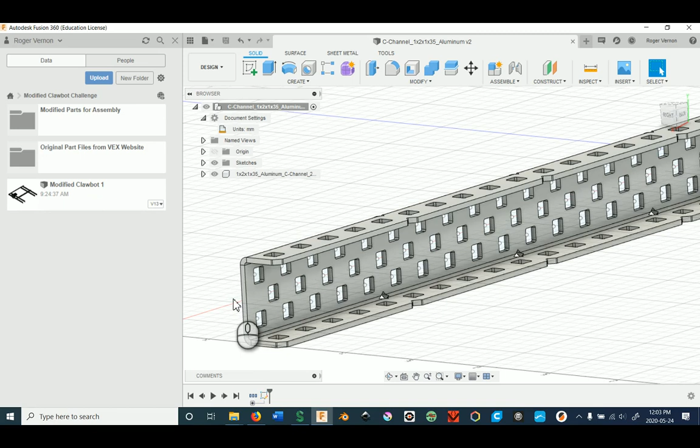In this tutorial I'm going to follow up on our previous one about how to put together points for assembling VEX parts for a VEX robot. So in the last video I showed you how to put together a point, how to do rectangular patterns on the layout of a sketch, and I'm going to show you how to transpose those now from this face across to this face. Okay, well, let's get started.

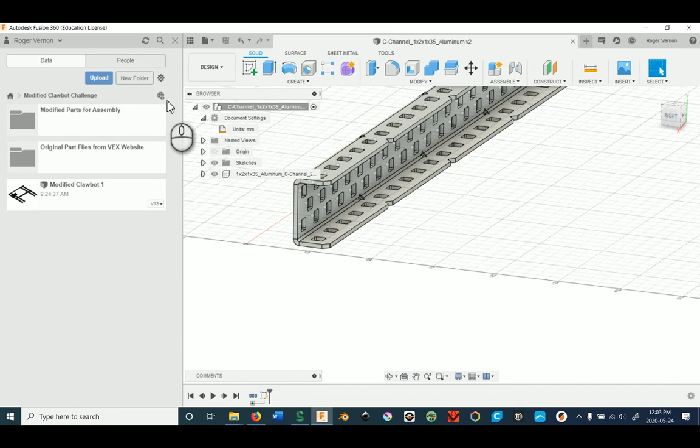I'm going to do the same thing that I did before. Do I need to bring in a file from here? Nope, I'm all set. So I'm just going to grab my sketch, and I'm going to be drawing points on this face now instead of the other face. So this face here is where I'm going to be drawing. And it's taking a while to think about life for some reason. Apparently I really scared it. There you go. Alright, so it's all laid out.

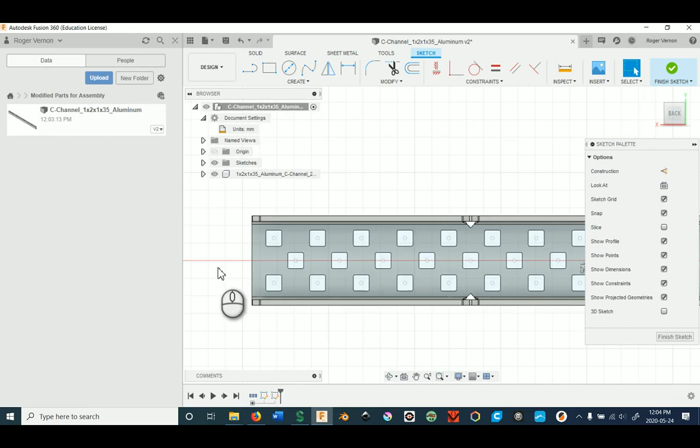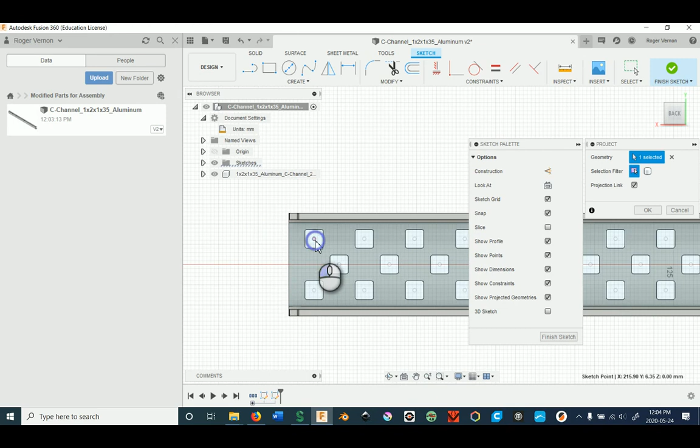I'm now drawing on the inside of that. Now you can see these points here, those are actually on the back side over here. These are the ones we did before, and now I'm actually on the inside. So I want to get those points through. The way that we do this is, well, you can draw them again like we did before, or hit P for project and then click on it. Unfortunately, I would love just to be able to click and drag and highlight all of them and project them through, but you can't.

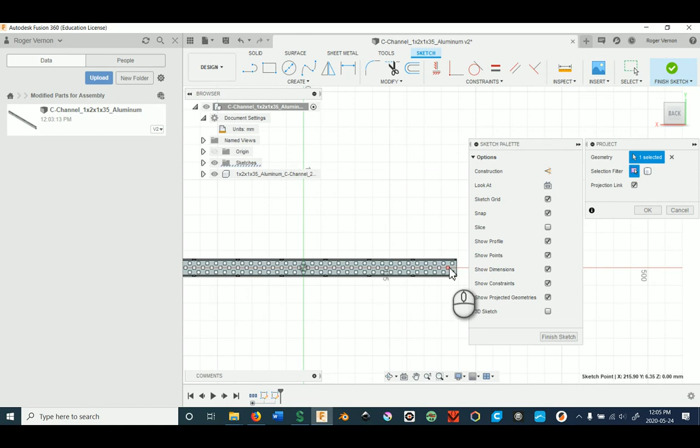So what I do is I come through and I look at the different points that I can grab, and I also look all the way down. I can go along and click each one of these. Yes, you can do that. But my end pattern is like this. Do you see it? It's like the less than symbol in mathematics. So it's with the alligator jaw facing open to the right. So that's what I want to project.

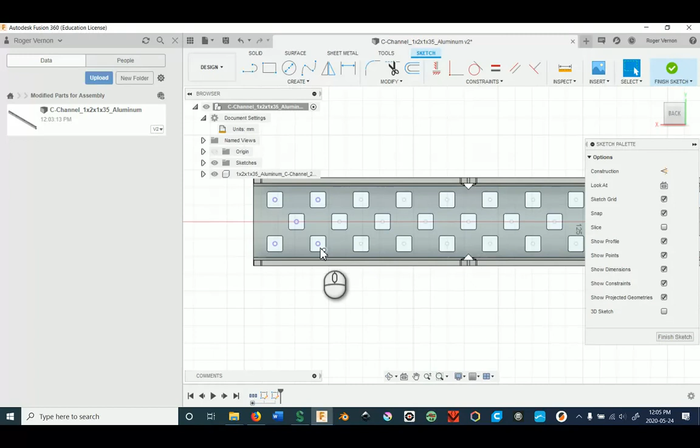So I need these first two, but then I'm going to get these three. 1, 2, 3, and I'm going to project all 5 of those to start and hit OK. Now I'm going to do a rectangular pattern of just these 3 across all the way to the end, and that's it. Because you can actually use these projected points as joints, as points to join by when you go to assemble your parts, and we'll see those in later videos, so don't worry about that right now.

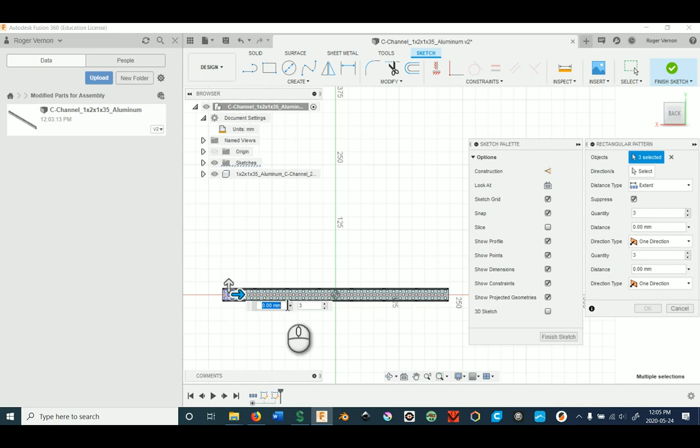So I'm going to go and create rectangular pattern, and it's going to be for this point. I missed that first one. Points are really hard to grab, so I actually often drag like that just so I can get them. There we go. So now I got them. Good question. How many more left to go? I think it's 34 left to go. I'd have to double check that.

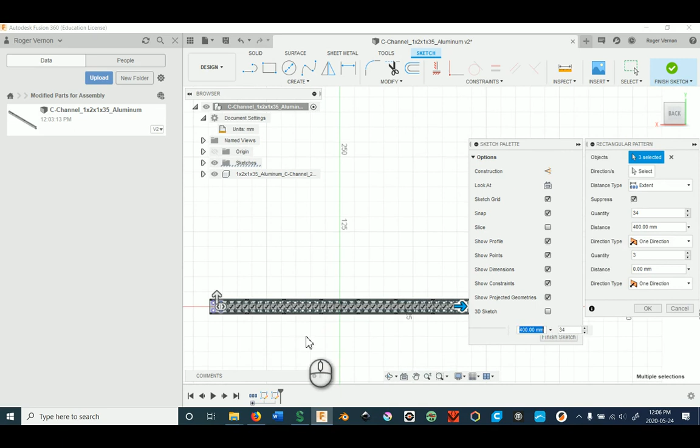And the distance will be like the middle row from the previous side, where I lose ½ inch here in distance and ½ inch on the other side too. So I think I'm going to end up losing a total of 1 inch across the entire distance, and the entire distance of a 35 hole metal is half of the 35, so 17.5 inches is the total length. And VEX uses that for a reason, because in their games your maximum length is 18 inches by 18 inches by 18 inches. So if each piece is 17.5, that gives you enough wiggle room to be within the legal parameters.

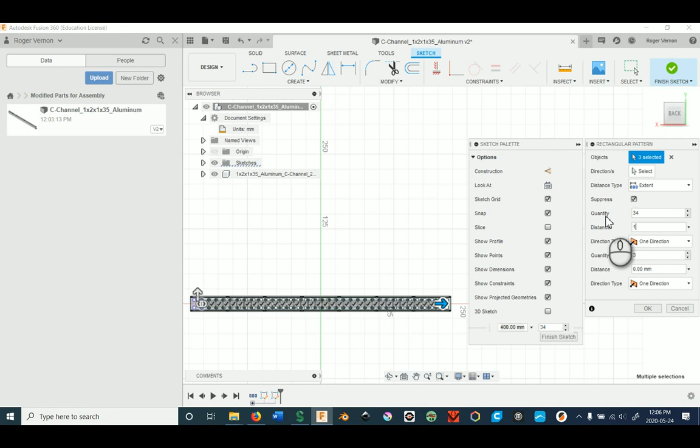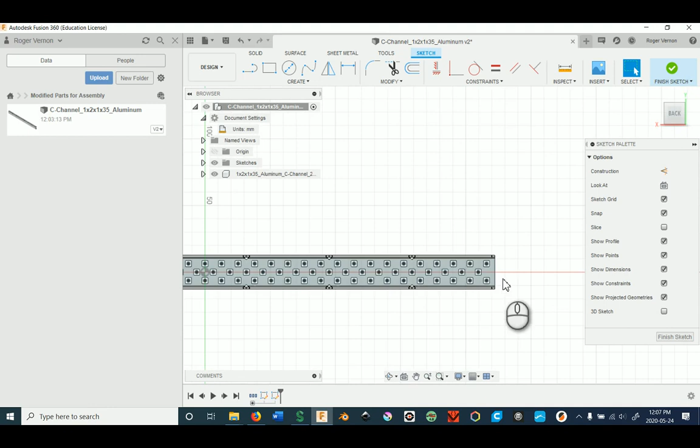So I lost ½ inch at each end of the metal for the holes, so I'm left at 16.5 inches, I believe. Should get us right to the end perfectly. Let's zoom in and double check. Looks like we're right on schedule. Perfect. Again, remember, I've got triple copies sitting here, and I just need singles. Often people do triple copies, and it just adds to all the geometry that you end up carrying along in your file, and you'll slow down your computer as it has to re-render triple the amount of geometry every time.

Okay, so I think I'm done that sketch. I've got all my holes there, and I'm done. All right, there you go, folks. So now we've got points on this face here from the previous video. Now we've got points on this face here. So now if I was to bring in a screw, I'd put it on this face, and if I had a nut, I'd put it on this face with these points, and I'll show you those again in a later video.

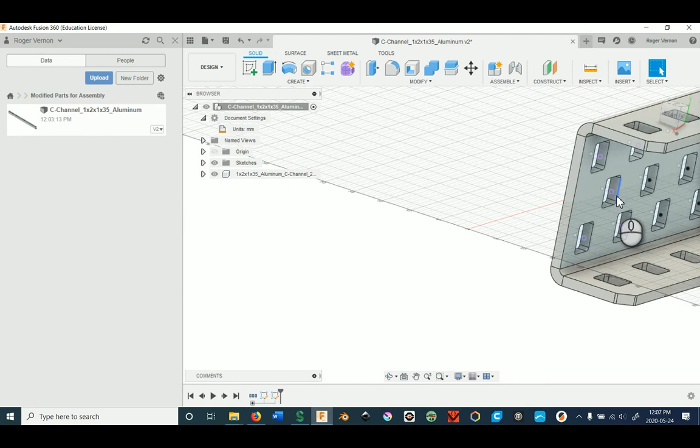Now the last video that I'll make coming up next is the same thing we just did, front and back, but for this top row here and the inside of it, and this bottom row here and the outside of it. Okay, so we'll do that one in the next video.